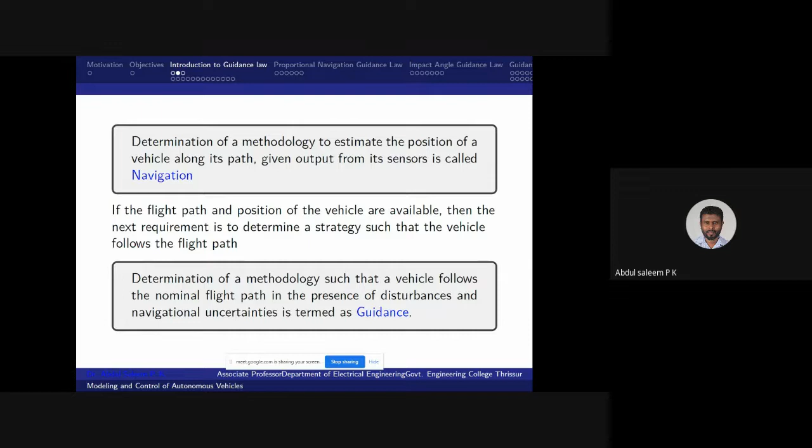Now we have to determine a methodology by which the vehicle can follow the nominal path. Suppose this is a nominal path - then we have to develop a methodology by which the vehicle, that is the missile, is able to move along this path, or follow this path.

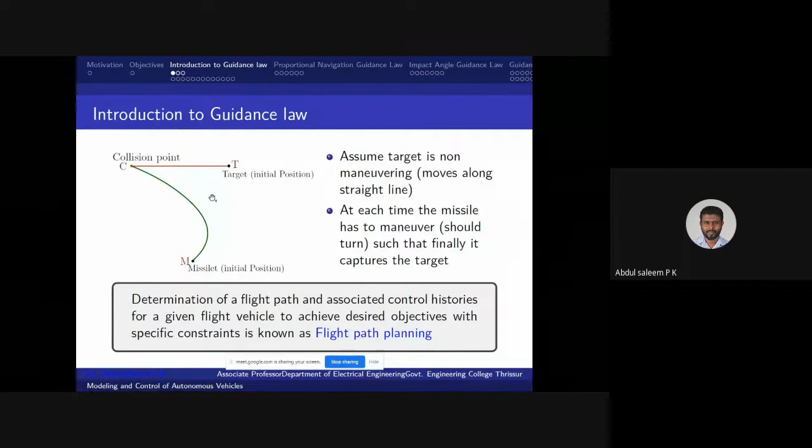That methodology, that strategy, is known as guidance. And also, in order to achieve this, we have to make sure that the angular orientation is along a particular direction, and for that a control is required. But this is just some basic concept about navigation, guidance, and control.

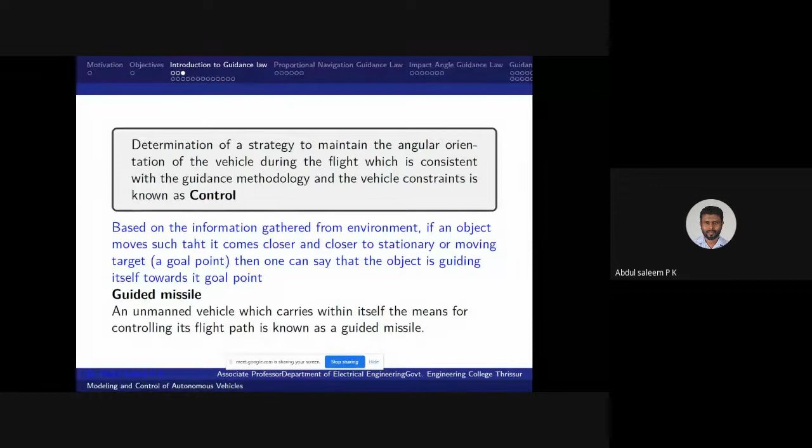Based on the information gathered from the environment, if an object moves such that it comes closer and closer to a stationary or moving target, then we can say that the object is guiding itself towards its goal point. A guided missile is an unmanned vehicle which carries within itself the means for controlling its flight path - this is known as a guided missile.

Now we can have some basic concepts on interception and avoidance. In the case of a missile, the primary objective is interception - that is, the missile should hit the target. Whereas in the case of robots, the main objective may be to avoid an obstacle.

Therefore, these two things are actually two sides of the same coin. If we have a strategy that can be used for intercepting a target by a missile, then the opposite strategy can be used to avoid an obstacle by a robot.

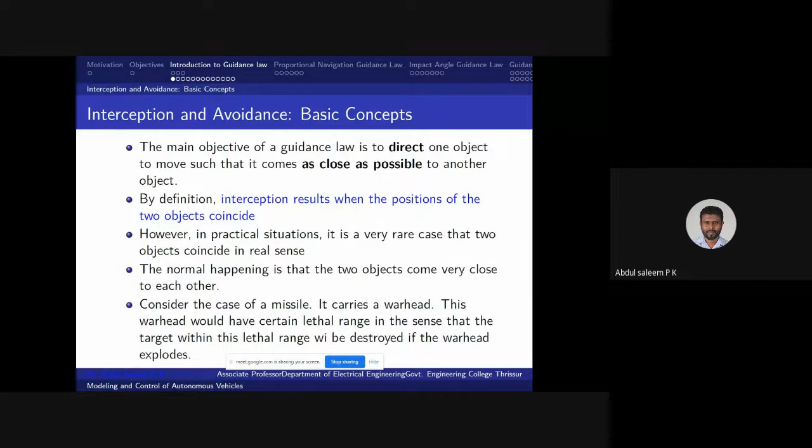Now we will discuss the engagement between two-point objects. Here we assume that we are not applying any guidance law. If we are not applying any guidance law, what is the condition so that a missile will hit the target? If we know that condition, then what we can do? We can develop a methodology such that this condition is satisfied.

Once this condition is satisfied, we can ensure that the missile hits the target. Therefore, first we will consider a case where the missile is not guided, an unguided missile. So here we have a missile M and a target T. This is the directional velocity of the missile, and this is the directional movement of the target. We assume that there is no maneuvering.

Now we have some definitions. The distance between the missile and target is known as line of sight. It is usually denoted by the letter R, which is also known as range or LOS separation, the line of sight separation. And the angle made by this LOS with respect to a reference, for example the x-axis, is known as LOS angle, and in this presentation it is denoted by theta.

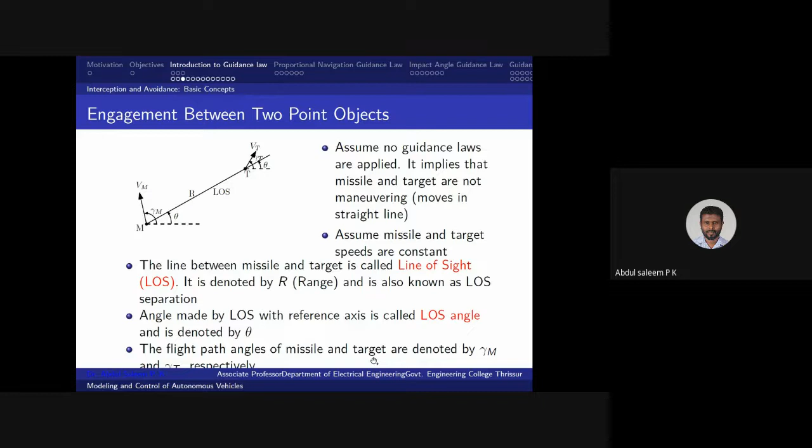Now we can think about the modeling of the kinematics or the modeling of the engagement between this missile and target. What we are doing is that this velocity vector of the missile is resolved into two components. One component is along the direction of the LOS, and the other component is perpendicular to LOS. The same way, we have resolved the target velocity also into two components, one along the direction of the LOS and the other along a direction perpendicular to LOS.

Therefore, this component VMR is the component of the missile velocity along the LOS, obtained as Vm into cosine of this angle. But this angle is actually gamma m minus theta. Therefore, we will be getting VMR equal to Vm cos(gamma m minus theta). Similarly, we can get the other component V theta equal to Vm sin(gamma m minus theta). In the same way, we can resolve target velocity into two components as given by these two equations.

But here we assume that Vm, Vt, gamma m and gamma t all are constants. Therefore, the only state variables are r and theta. Therefore, in order to develop a mathematical model, we have to find r dot and theta dot.

So r dot is the velocity along this direction, that is dr by dt, the velocity along this direction. But that is nothing but the target velocity minus the missile velocity components. Therefore, Vtr minus Vmr is the velocity along this direction. Therefore, r dot will be equal to this expression, equation 1.

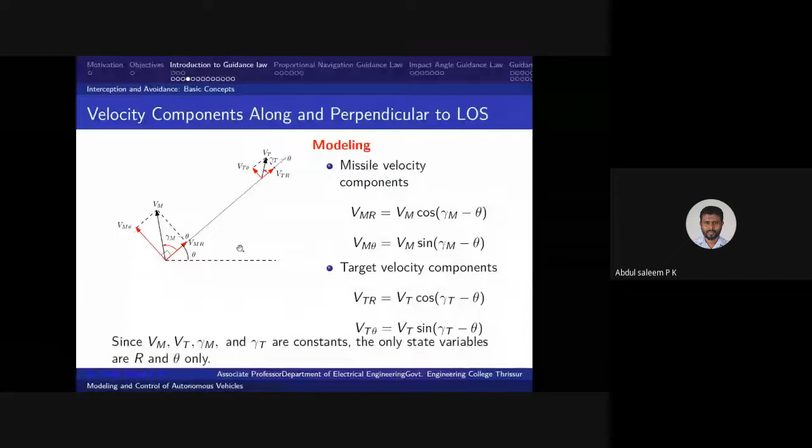In the same way, V theta, which is also equal to r into theta dot, will be equal to the difference of the velocities along the direction perpendicular to LOS. Therefore, this velocity component minus this velocity component will give you r theta dot. Therefore, these are the two state equations or engagement equations for this case.

Now, using these two equations, we can develop a methodology so that we can derive the condition for capturability of the two vehicles, the missile and the target. So for that, first we will obtain a V theta versus Vr trajectory. V theta is the velocity along a direction perpendicular to LOS, that is R theta dot, and Vr is R dot, the velocity along the LOS direction. We can get many interesting results if we draw this V theta-Vr curve.

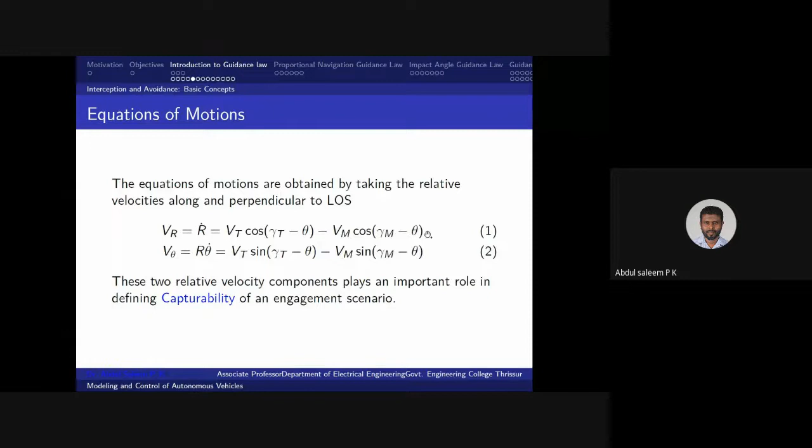For that, what we are doing is that first we will find VR dot, that is we will take the derivative of this equation, VR dot or R double dot. If you differentiate this with respect to time, we will get Vt sin(gamma t minus theta) into minus theta dot. Similarly, Vm sin(gamma m minus theta) into minus theta dot. Therefore, we will get an expression like this, which can be simplified into theta dot into V theta, because Vt sin(gamma t minus theta) minus Vm sin(gamma minus theta) has already been defined as V theta. Therefore, we get an equation like this.

Similarly, we can obtain the other equation, V theta dot is equal to minus theta dot into Vr.

Now, in both expressions, we have theta dot. Therefore, from here, theta dot is equal to Vr dot by V theta. And from this equation, theta dot is equal to minus V theta dot by Vr. We have got this equation. Now we can cross multiply these two equations.

It is clear, it's obvious that this equation represents that of a circle with radius C. How can we get C? By substituting the initial condition, we can get the value of C, obtained from this equation. Therefore, the trajectory Vr, V theta will be a circle of radius square root of Vr naught square plus V theta naught square. Multiply equation 4 and 6 by R yields...

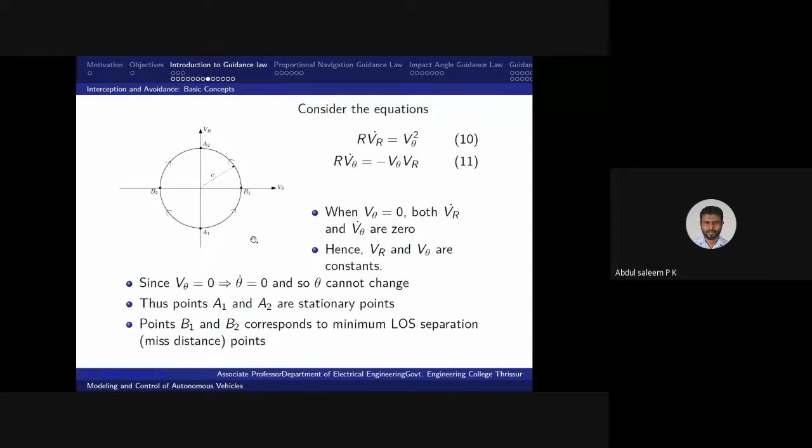Now we will see three different cases based on these discussions. I will show you one by one.

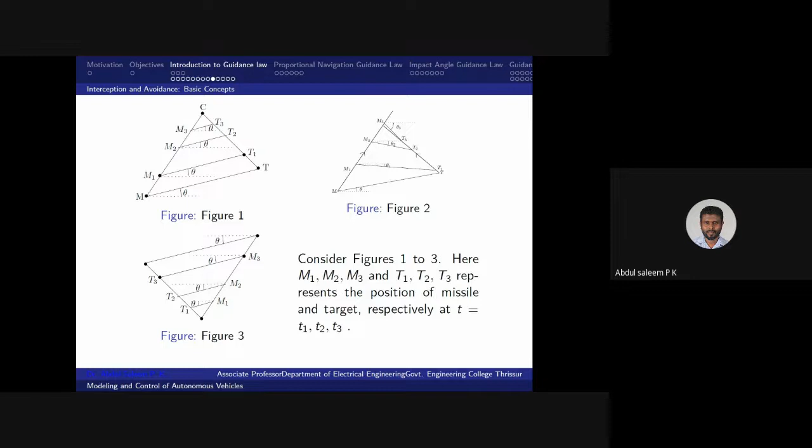First case, this one, is called a collision triangle. Initially missile is here and target is here. Missile is moving along this direction and target is moving along this direction. At t equal to 0, this is the position. At t equal to t1, this is the position of the missile and this is the position of the target. The LOS angle, with respect to the reference x-axis, is theta. This is the case for t equal to t2 and this is the case for t equal to t3. But you can see that in all these cases, theta is the same.

There is no change in theta. If that condition is satisfied, then theta dot will be 0, that is, it is a stationary point. Theta dot equal to 0.

One more thing you can see is that as the engagement proceeds, the distance between missile and target is decreasing, and finally they will collide at this point. From here we get a very interesting result: in order to guarantee that a collision is achieved, theta should not change, theta dot should be 0 or theta should be constant. Also, the distance between missile and target should decrease as the engagement proceeds.

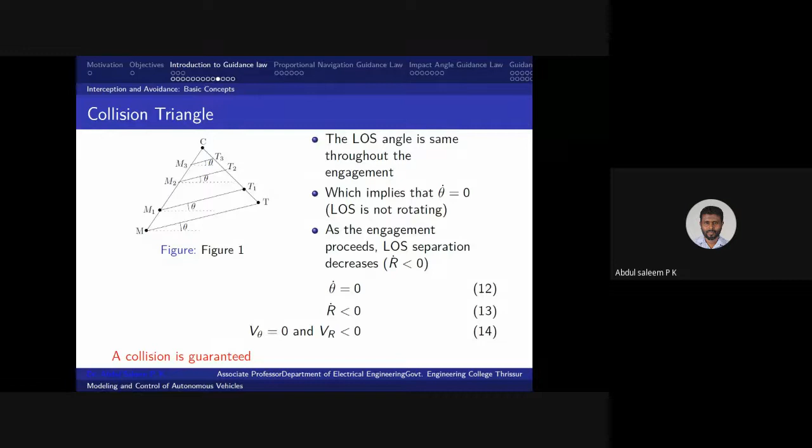Therefore, the conditions are theta dot equal to 0 and r dot less than 0, or v theta equal to 0 and vr less than 0. These are the conditions that must be satisfied in order to achieve a collision between missile and target.

Now, here is another case where we can see that the values of theta are not the same. They are different here. Even though the values of theta seem to be increasing, it is increasing in the negative direction. Therefore, actually theta is decreasing, and theta dot will be negative in this case. Anyway, theta dot is not 0.

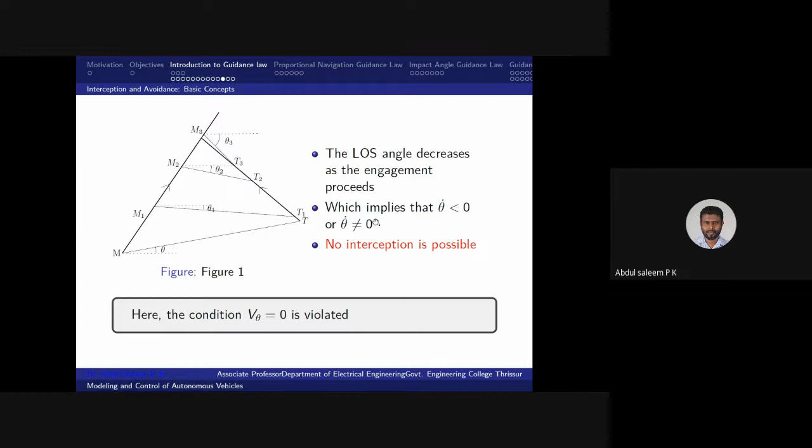The distance between the target and missile is decreasing, so that condition is satisfied, but the other condition, theta dot equals 0, is not satisfied. Finally, you can see that no interception is possible, because at this point the missile is here and the target is here only. After some time, the missile will go here and the target will come this way. Therefore, collision is not possible in this case, because the first condition, theta dot equals 0, is not satisfied.

The third case: here you can see theta is the same throughout, that is, theta dot equals 0, so the first condition is satisfied. But this is the initial case, this is t equal to t1, t2, t3, etc. Here we can see that the distance between missile and target is increasing as the engagement proceeds, and we can see that here it is not possible to have an interception.

Therefore, what we can conclude is that the condition for a guaranteed collision between the two is that theta dot should be equal to 0 and r dot should be less than 0. If these two conditions are satisfied, then definitely a collision will be achieved. If theta dot equals 0 and r dot is greater than 0, then no collision is possible. In that case, if avoidance is our objective, this condition can be used.

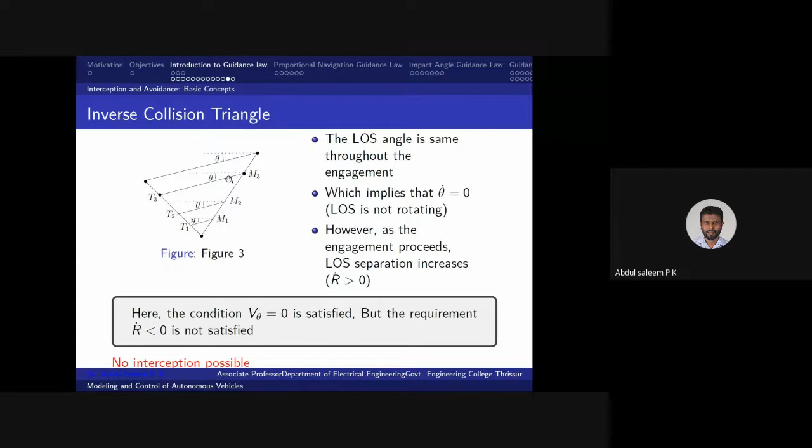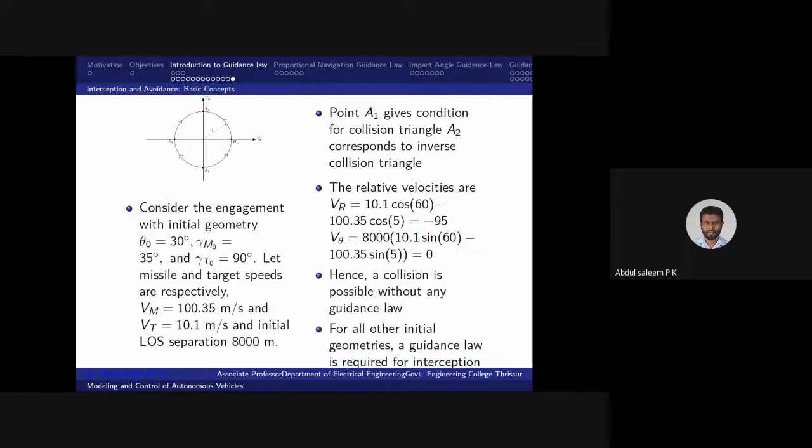Only for this particular initial condition is the collision possible, provided you are not applying any guidance law. Therefore, what we are going to do is apply a guidance law such that these two conditions are finally satisfied. Once satisfied, a collision will be possible.

Now we will discuss some guidance laws. One is the proportional navigation guidance law, also known as the PN guidance law. This is one of the most widely used guidance laws because it is very simple and easy to implement, and it is robust. Now we can see how this PN guidance law is developed, or what is the history behind the development of this guidance law.

Earlier, now we know that the mariners are using some sophisticated instruments, but in earlier days it was not so. What is the thumb rule that the mariners were using to avoid a collision with another ship? There may be a number of ships, and each ship should make sure that it is not colliding with any other ships.

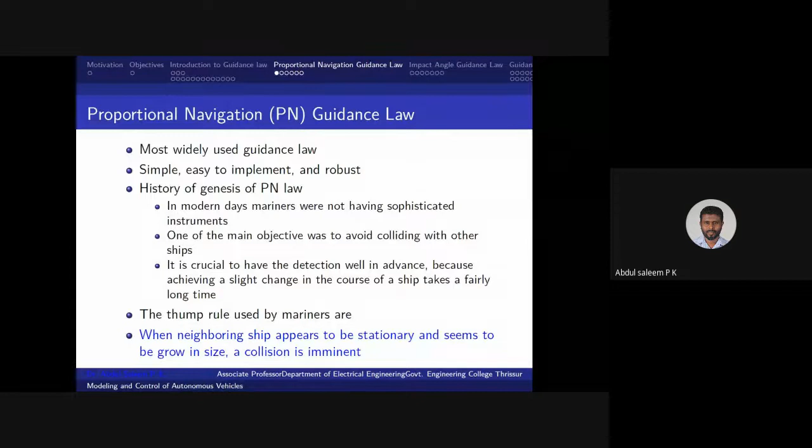The thumb rule they used is: when a neighboring ship appears to be stationary and seems to be growing in size, a collision is imminent. If the people in a particular ship feel that the other ship is stationary, and also that the size of the other ship is growing, then surely a collision will happen. That is the analysis we can have.

The other ship appearing stationary with respect to our ship implies that the line of sight between the two ships is stationary, that is, not changing. If the other ship seems stationary, it means the line of sight between our ship and the other ship is constant, not changing. That is, theta is not changing, so V theta is equal to 0.

The second condition, that the size of the other ship seems to be growing, implies that the LOS separation between the two is decreasing, that is, VR is less than 0. Actually they were using these two conditions: V theta should be equal to 0 and VR should be less than 0.

If these two conditions are satisfied, then they know that a collision is sure, and therefore they have to maneuver such that a collision is avoided. These are the two conditions which are necessary and sufficient to ensure that an interception of the missile with the target is possible. These two observations were used in designing the proportional navigation guidance law.

The second observation, VR less than 0, can be achieved if the missile is launched approximately towards the target or predicted collision point. If the target is moving, we have to find the predicted collision point, and the missile should be pointed towards that point. If it is stationary, the missile should be pointed towards the target point.

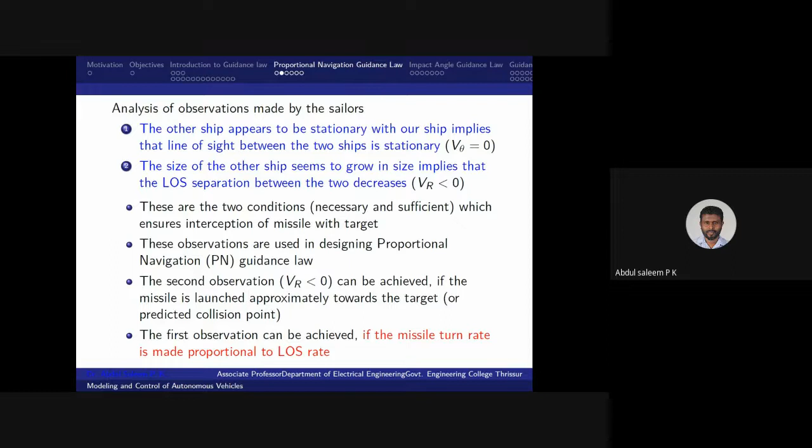We can write the guidance law as gamma m dot, the missile turn rate, proportional to the LOS turn rate theta dot, or gamma m dot is equal to n theta dot. This n is known as the navigation constant or PN constant. Therefore the lateral acceleration will be equal to this turn rate multiplied by velocity, that is n vm theta dot. This is the guidance command applied to ensure a collision between target and missile is possible. This is known as the PN guidance law.

I will show some simulations. We can assume that we have a missile-target engagement with these initial conditions.

Initially the missile velocity vector is at 60 degrees. Also, the target velocity vector is at 45 degrees. The initial LOS angle is 30 degrees, and the initial separation between the two is 7,000 meters. Also, we assume the target velocity is 250 meters per second and the missile velocity is 400 meters per second. One more assumption: the target is non-maneuvering.

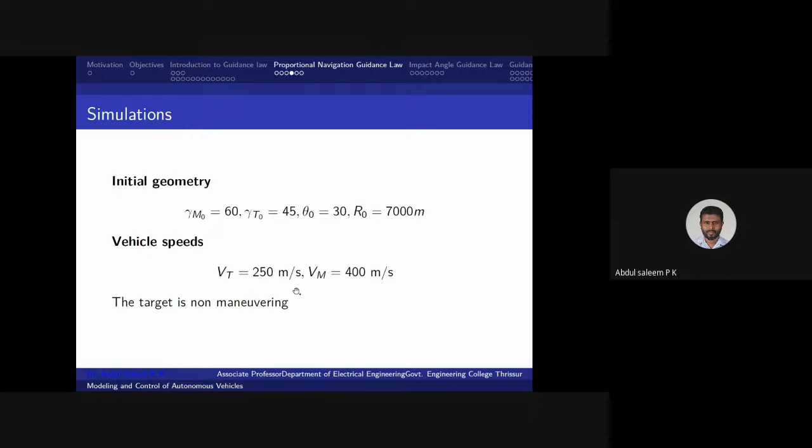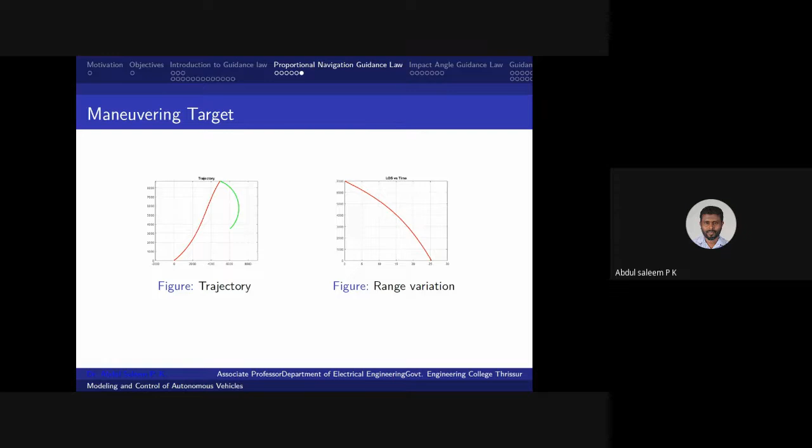There are a number of guidance laws. I am not going to discuss all of them. If you are interested, you can go to the literature and see different types of guidance laws.

Now we will see the impact angle guidance law. Impact angle means the angle at which the missile finally hits the target. It can be 90 degrees, 30 degrees, 40 degrees, etc.

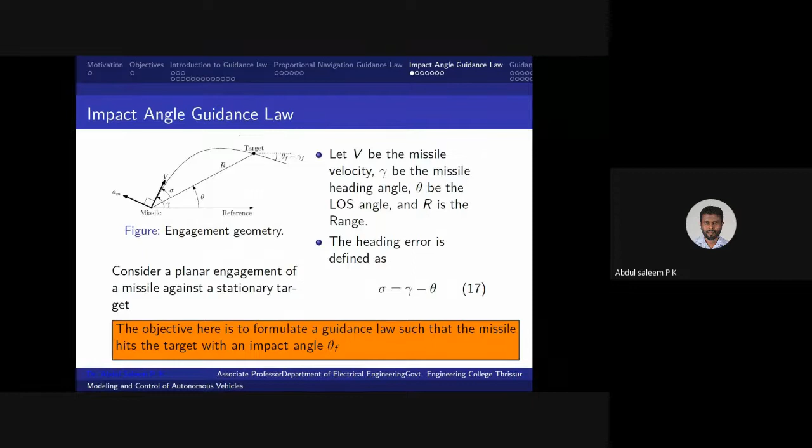See here, suppose this is a target, but we can hit it like this. In this case, if this is the reference, the angle is 90 degrees. Therefore, theta f is equal to 90 degrees.

Or we can hit the target like this, in which case theta f is equal to 0. Or we can hit the target like this, then theta f is maybe minus 30 degrees.

The direction at which the missile hits a target is very important for destroying it. Depending on which direction you hit along, the damage will be greater. Therefore, the final angle is important to achieve a more effective collision of the missile with the target, or to destroy the target.

Now, how can we achieve this desired impact angle? That is the next discussion.

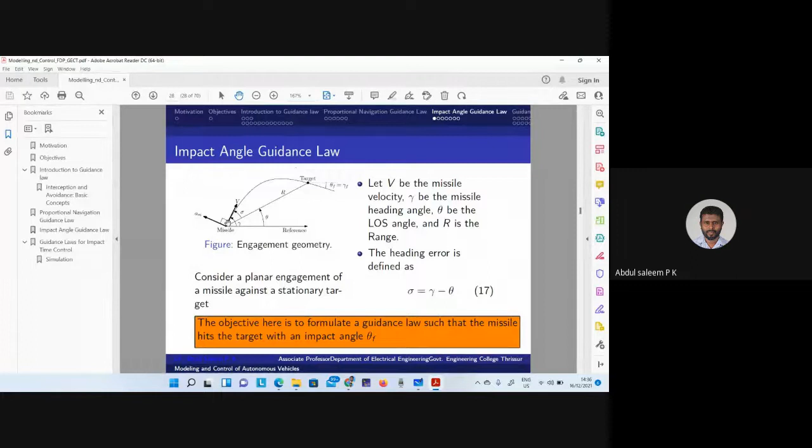Similarly, r theta dot is equal to minus v sin sigma, because the target velocity is 0 and the component of velocity perpendicular to the LOS equals v sin sigma. So minus v sin sigma equals r theta dot, or theta dot equals minus v sin sigma by r, and gamma dot equals n theta dot. That is the guidance law, where we are applying the PN guidance law.

If you are applying the PN guidance law, gamma dot is equal to n theta dot, and this expression, equation number 20, will change with respect to the guidance law we are using. But these two are the basic kinematics, that is constant, that is fixed. But this is the controlling factor. By changing this gamma or gamma dot, we are controlling the flight path. Therefore, different researchers will use different guidance laws, and accordingly this gamma dot expression will change. Since we are using PN guidance law, we have written gamma dot is equal to n theta dot.

Now, in order to achieve a desired final angle, we need a relationship between final impact angle and the navigation constant n. If you get such a relation, you can compute the value of n and use it. But that is the idea being used here. For that, we can integrate. Before that, we can do something.

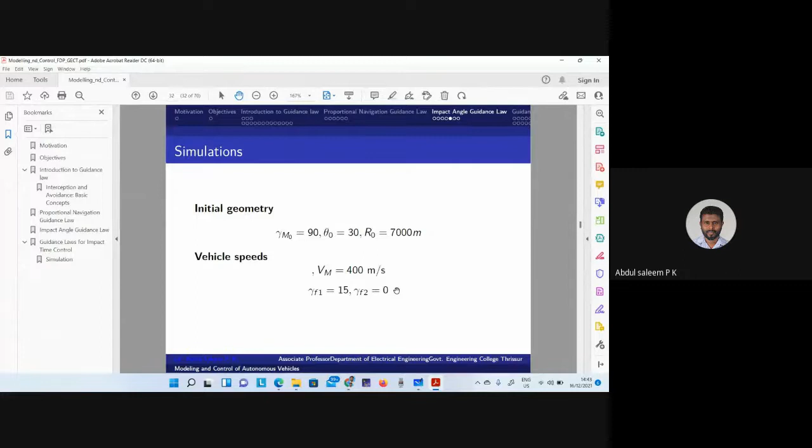We are considering two cases. In the first case, we are interested to achieve an impact angle of 15 degrees at interception time, so gamma f1 is 15 degrees. For the second case, we want gamma f2 equal to 0 degrees. I have done the simulation, and you can see the results.

Initially it is at 90 degrees. That is why the missile is going like this, maneuvering, and finally it reaches the target point. Here you can see, if you extend this line and draw a horizontal, this angle will be equal to 15 degrees.

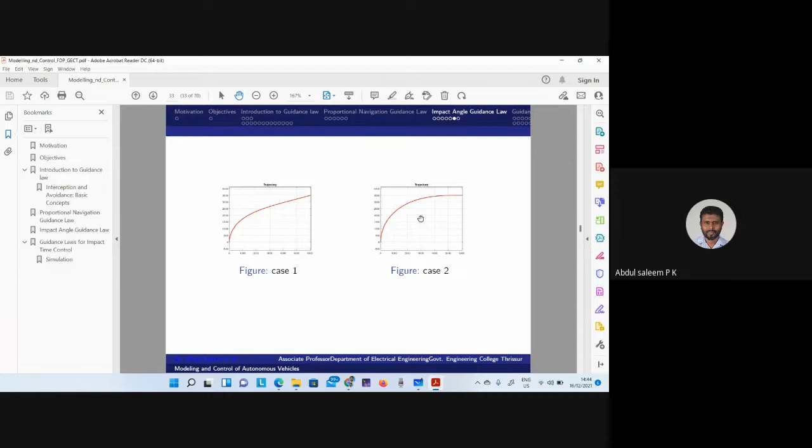That means the desired impact angle is satisfied here. For the second case, our objective is that the desired final angle should be equal to 0 degrees. It is very obvious that it is achieving 0 degrees at the interception time. Therefore, by using this methodology, we can achieve a desired impact angle.

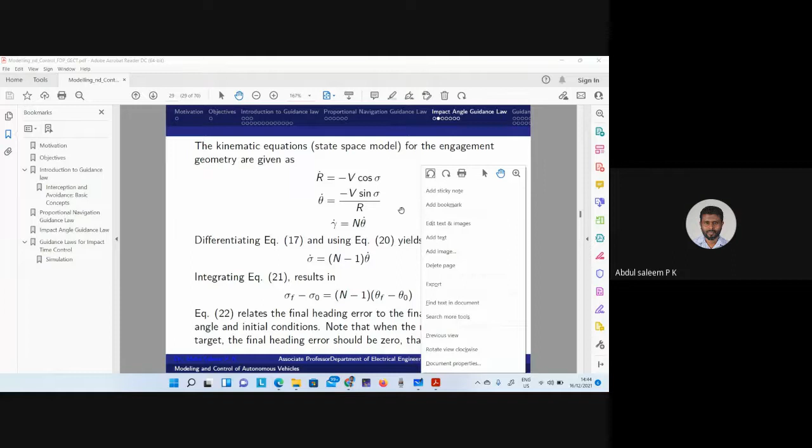The strategy we have used is our guidance law is N*V*theta_dot, where the value of n is computed such that we achieve a desired impact angle. For that, we should have a relationship between n and sigma_f, and also a relationship between sigma_f and the initial conditions.

But that formula we have obtained here. So if you compute n using this formula, with sigma_0 known, theta_0 known, and gamma as our desired final impact angle, substituting these values you will get the value of n. And if you use that n, you will be able to achieve the desired impact angle.

But there are some issues. If you are using a PN guidance law, there is a condition that n should be greater than or equal to 2, otherwise your final acceleration will be infinity. I am not going to discuss that in detail, but note this result: n must be greater than or equal to 2.

So if you substitute n equal to 2 here, this will be theta_0 minus sigma_0. That is the minimum possible final impact angle. The minimum possible value is theta_0 minus sigma_0. And in order to get the maximum value, n should be equal to infinity.

If n is infinity, sigma_0 by infinity is 0, so gamma is equal to theta_0. But this value is an ideal value only, because if n is infinity, then our lateral acceleration, n times theta_dot, will also be infinity, which is not practically feasible. Therefore, ideally we can have an impact angle up to theta_0.

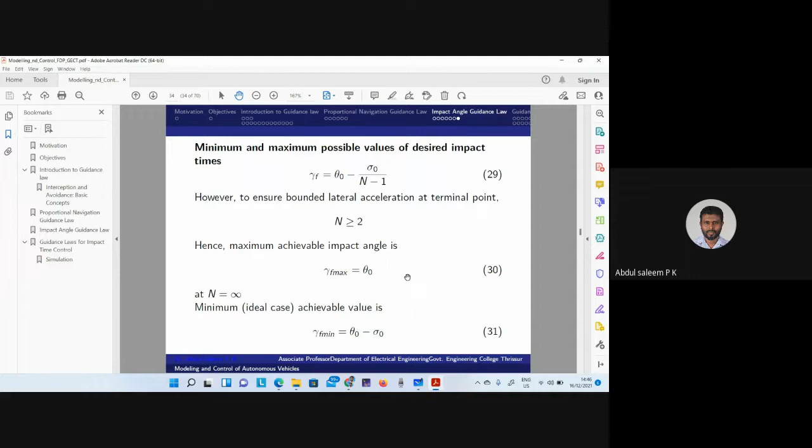Therefore, there are some limitations if you use this methodology. There are many papers in the literature showing they were able to achieve the full 360-degree impact angle, meaning any desired impact angle is possible. Some guidance laws were developed for this; you can find such papers in the literature.

And finally, we will discuss guidance laws for impact time control. As I explained earlier, the primary objective is that the missile should hit the target, but besides this main goal there are other constraints, such as the impact angle constraint we have seen, and also a constraint on the time at which the missile hits the target.

For example, suppose I say my missile should hit the target at t equal to 20 seconds. There is a constraint: it cannot be 21 seconds, it cannot be 19 seconds. It should reach there exactly at 20 seconds. Why so? I will explain.

Suppose a ship of an enemy nation is coming to attack our country. Then we should destroy that ship, so we may launch a missile to destroy that ship. But that ship has some self-defense mechanism, known as a close-in weapon system, CIWS.

By using this mechanism, the ship is able to destroy the missile that we have launched, so our objective is not satisfied; we have failed to achieve our goal. But if you launch a number of missiles, for example suppose I launch 4 missiles, and if all of these missiles reach the target simultaneously, then the defense system may destroy one or two missiles, and the other missiles will be able to destroy the enemy ship.

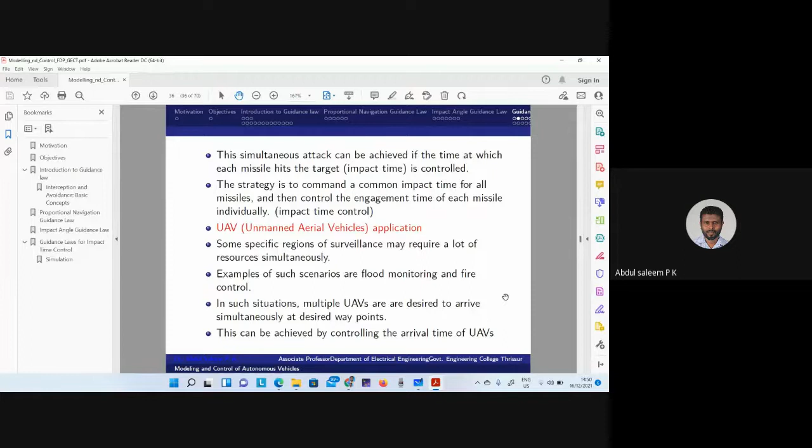But there are so many methods. One method is that we will control each of the missiles individually such that they are all commanded with a common impact time. For example, suppose I have 4 missiles and I am commanding my desired impact time as 30 seconds for all the missiles, and I am applying this guidance strategy. Then each of these missiles will move using the guidance command applied to it, and all of them will reach the target point at t equal to 30 seconds, and they will succeed in their mission. That methodology is used in this explanation.

The objective is that we have to develop a formula for AM so that it will satisfy two conditions: one, it will hit the target; second, it will hit the target at a desired predefined impact time. The objective is to find a proper guidance law governing AM, which can guarantee a desired impact time TF, and by using this guidance law, we should be able to have a simultaneous impact of multiple missiles at that predefined impact time TF. That is our objective here.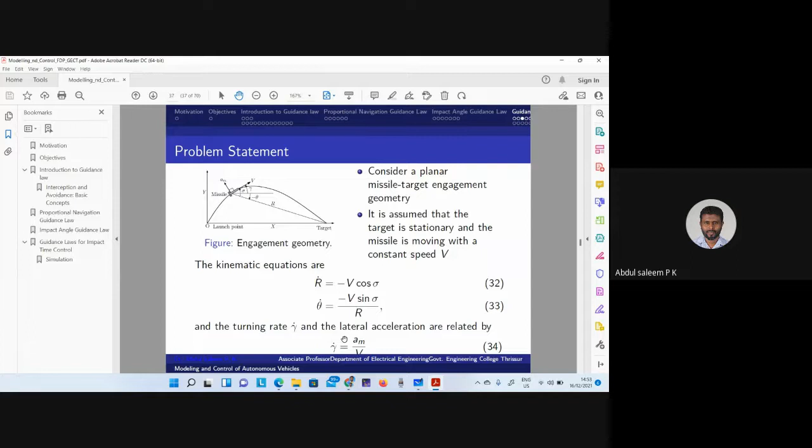Now, if the velocity of the missile is constant throughout, or if we consider the average velocity, then we can see that a missile moving along this longer path will have maximum impact time, and a missile moving along this shorter path will have minimum impact time. Therefore, in order to get different impact times, what we have to do is vary the path lengths. How can we vary the path length? Path lengths can be varied by varying the turn rate gamma dot, and gamma dot can be varied by varying the lateral acceleration AM. Therefore, our objective is to find an expression for AM so that a desired gamma dot is obtained, and thereby we will be able to achieve the desired impact time.

Now, first we can go for PN guidance law. The PN guidance law command is A equal to N V theta dot. Now, the parameter we can vary theta dot by is N. As we have done for the case of impact angle, we should be able to get an expression for N, which is a function of the desired impact time. Then we will be able to control the final arrival time of the missile. But we can see whether it is possible or not.

This is the PN impact time. You can calculate the expression for the impact time using the PN guidance law. For this, we have already seen these equations, including the heading error gamma minus theta. Actually, we want to control gamma dot, but gamma dot can be controlled by controlling sigma dot or theta dot. But theta dot we cannot control, it is a kinematic equation. Therefore, the only thing we can control is sigma dot. By controlling sigma dot, we will be able to control gamma dot, and thereby control the turn rate, and so get different path lengths so that different types of impact times can be achieved. I have already explained how this expression is obtained.

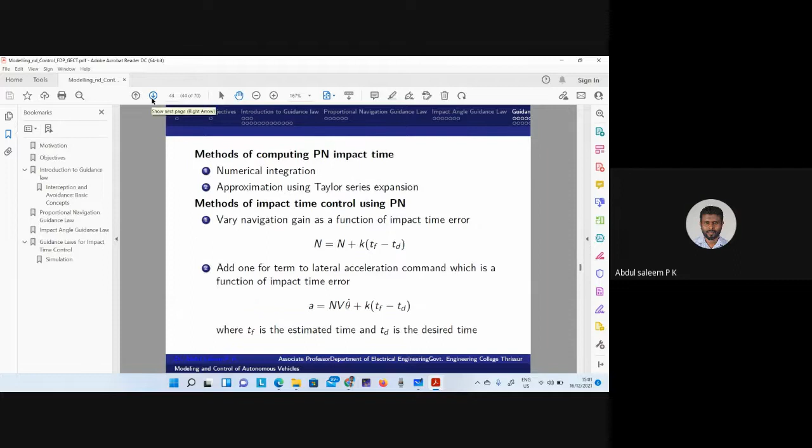Then how can we solve this issue? Our research problem is: can we formulate a guidance law such that an exact closed form solution for the impact time is possible? Also, the impact time can be controlled by a parameter which is an exact closed form expression in terms of the desired impact time. This is the research problem that is addressed to me. Fortunately, or for my luck, I was able to solve this problem, and I will explain how this problem is solved.

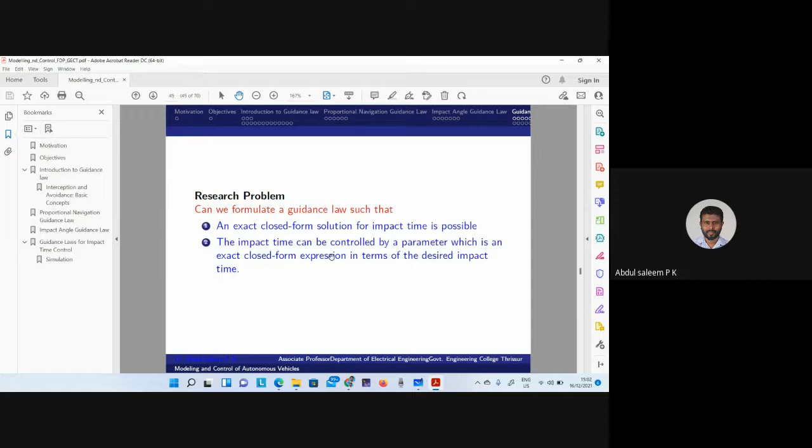Now I will explain the control formulation. I assume that my initial heading error is between this range, minus pi by 2 and plus pi by 2. That is my assumption. And I am proposing a two-phase variation in the heading error sigma as a function of the range R, as shown by equation 46 and 47.

But there are two phases. In the first phase, the heading error varies according to this expression. In the second phase, the heading error will be 0. That is, this is up to FR0. If your range, initially the range is R0, the range is decreasing, and when the range reaches FR0, where the value of F is between 0 and 1, it is a fraction.

Suppose F is equal to 0.8 and R0 is equal to 10,000. 0.8 into 10,000 is 8,000. If the value of r reaches 8,000, then this will be 0. Then after that, the heading error is 0 throughout. This is the variation in the heading error which I assume satisfies this equation.

Why have I chosen this equation? We can see later that if I choose a heading error variation as given by these two equations, then I'll be able to integrate the expression for impact time. That is the objective. Therefore, I am proposing a function - a variation for the heading error - such that that function is integrable.

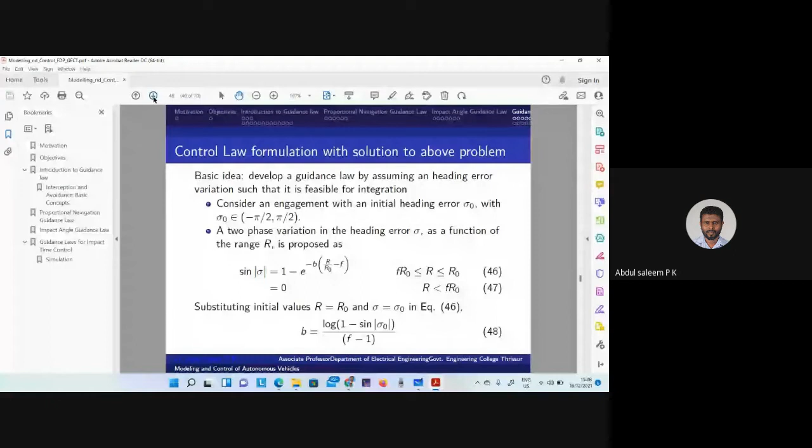Now we can derive the expression for impact time. This was our expression: d sigma by dt is equal to this expression. Therefore, I can take the terms containing sigma to one side and dt to the other. Then we get an expression like this: minus v dt equals r0 by b, into sine sigma by 1 minus sine sigma, d sigma.

Now this is easily integrable: minus v times the integral from 0 to tc, because at r equal to f r0, the time is tc only, so integral 0 to tc dt equals r0 by b, integrated over sigma from sigma0 to 0. Initially the heading is sigma0, and finally at the end of the initial phase, sigma is equal to 0. So the sigma variation is from sigma0 to 0, and this is the expression.

Now you can see that this expression, d sigma by 1 minus sine sigma, is easily integrable, and the integral gives 1 minus tan of sigma0 minus sec sigma0, divided by v. That is, we have got a closed form expression for tc, for the first phase. That is, for this one we have got this expression tc. Now we can find the expression for impact time for the next phase, that's tf minus tc.

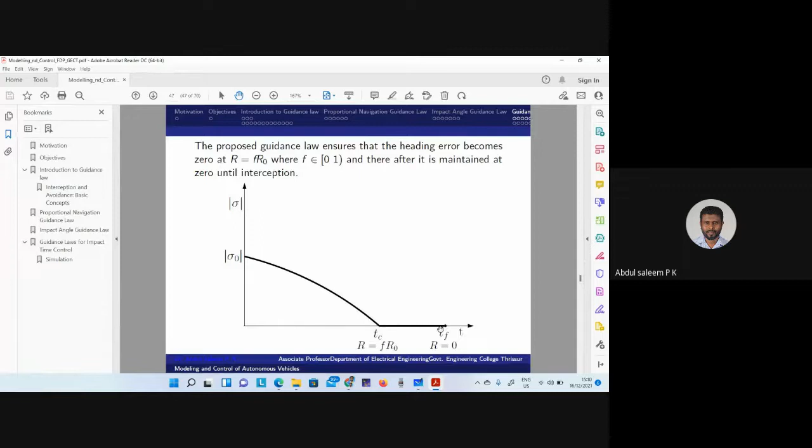Phase 2, the heading error is 0. Therefore, heading error 0 means it is moving along a straight line. There is no curved path, it is moving along a straight line. In that case, the time is just distance by velocity.

But distance is f into r0, because at that time r is equal to f times r0. The distance is fr0, speed is v. Therefore, if you divide fr0 by v, you get the time for the second phase. The total time is the sum of these two times, giving us an expression

which is a closed form expression for the impact time. This expression contains the parameter f, and also the expression for the desired impact time, and it is exact. Now we have to find an expression for the control parameter as a function of the desired impact time. That we can obtain from here.

Before going to that, I will find the maximum possible impact time and minimum possible impact time. For that, I should know how the impact time or engagement time varies as a function of f. The minimum value of f is 0, maximum value is 1. As f increases from 0 to 1, how does the impact time vary - whether it increases, decreases, or remains constant?

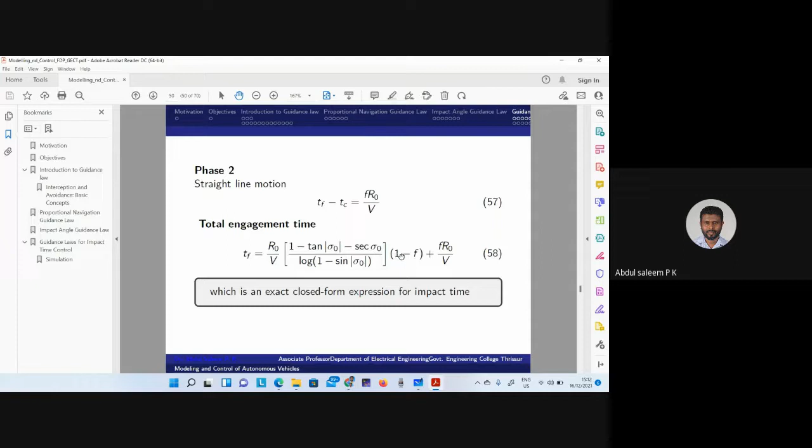Now these two can be substituted in this expression. This can be written as tf max and tf min. So this becomes tf max into 1 minus f, plus tf min into f. That expression is written here. Thus we have a simple expression for the impact time.

Tf is equal to 1 minus f into tf max, plus f into tf min, where tf max and tf min can be obtained by computing using these expressions. So we can find tf min and tf max.

From this we can get an expression for f. This expression is closed form, it is exact. Therefore, we have an exact closed form expression for the control parameter f, which is a function of the desired impact time, and also the initial condition, because tf max and tf min are functions of the initial conditions.

Thus I have achieved developing a guidance law where we have an exact expression for impact time, an exact closed form expression for this control parameter, and that control parameter is directly related to the desired impact time. Therefore, if your desired impact time is 30 seconds, you just put tf equal to 30 seconds here, compute F, and substitute this F value in your guidance law.

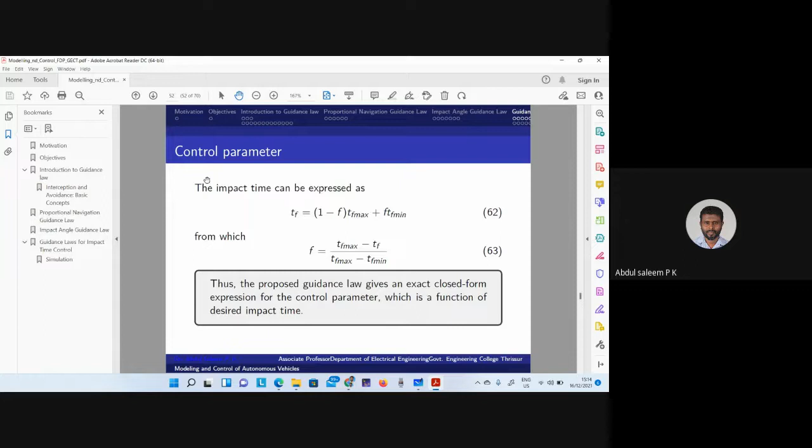You will be able to achieve a collision exactly at tf equal to 30 seconds. But the only constraint is that the tf you are selecting should be between the tf max and tf min computed by the above two expressions.

Therefore, the guidance law algorithm is: first compute tf min and tf max using those equations, then get a set of permissible values of tf like this one. But tf min is not actually possible because it is an ideal condition - to achieve it, the lateral acceleration would need to be infinity. But any value greater than this tf min is possible, and tf max anyway is possible.

It is closed bracket, and this is the open bracket. Now select a tf from S. Then find the control parameter using that equation, compute B using equation 48, and generate AM by substituting this F and B. You will be able to achieve the collision with the exact impact time.

As I explained in the impact angle problem case, here too there can be disturbances or autopilot dynamics by which the achieved acceleration may not be the same as the commanded acceleration. There will be some time lag between the achieved and commanded acceleration. Therefore, our guidance law fails to achieve the desired impact time if you use this algorithm obtained earlier, you will fail to get the desired impact time and collision because of this autopilot dynamics.

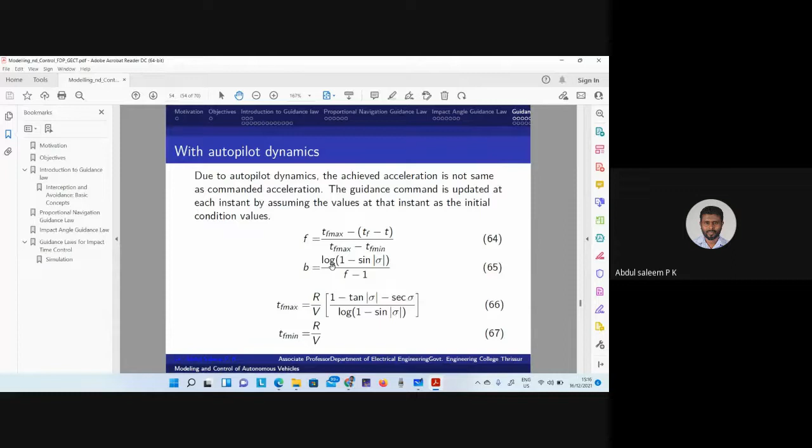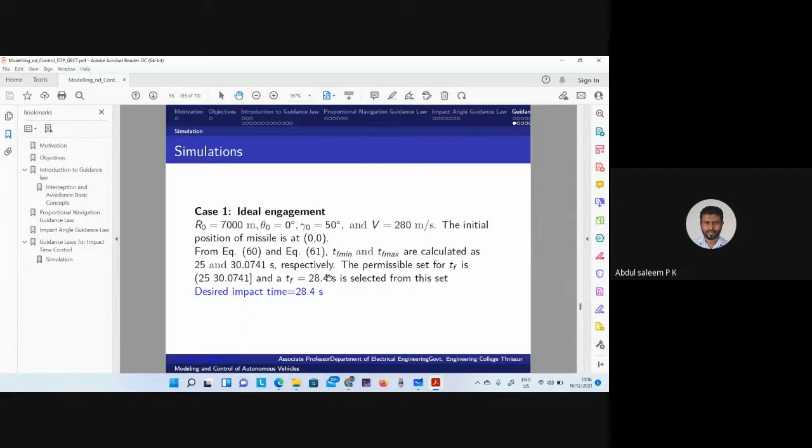That is, the guidance law succeeds in reaching the target exactly at 28.4 seconds. You can see this 28.4 seconds - exactly at 28.4 seconds it reaches the desired location.

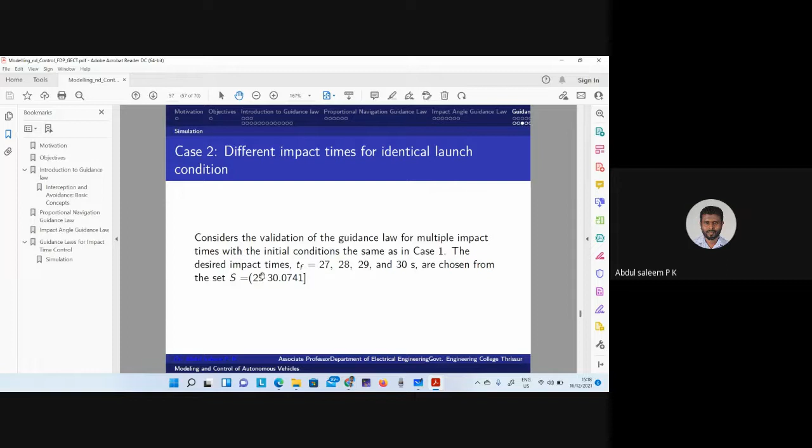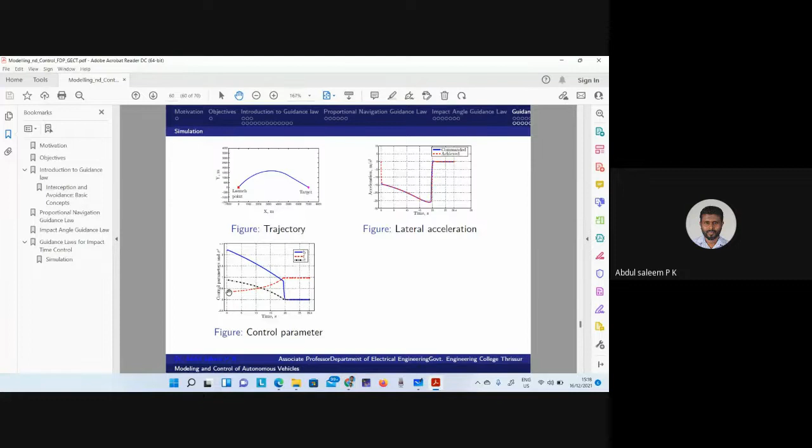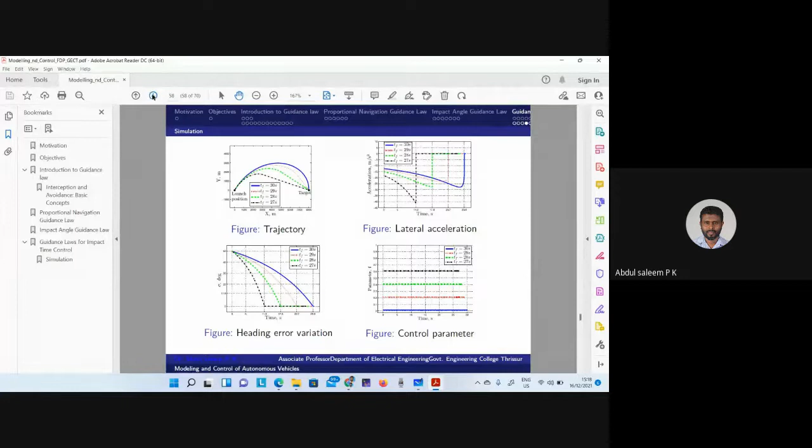Now, feedback control with autopilot delay. We assume an autopilot delay of 2.2 seconds is present. In that case also, our guidance law is able to achieve collision at exactly the desired impact time of 28.4 seconds. But you can see that here the control parameters are varying - not constant, whereas in the ideal case the control parameters B and F are constant. If you consider feedback control, the control parameters are not constant.

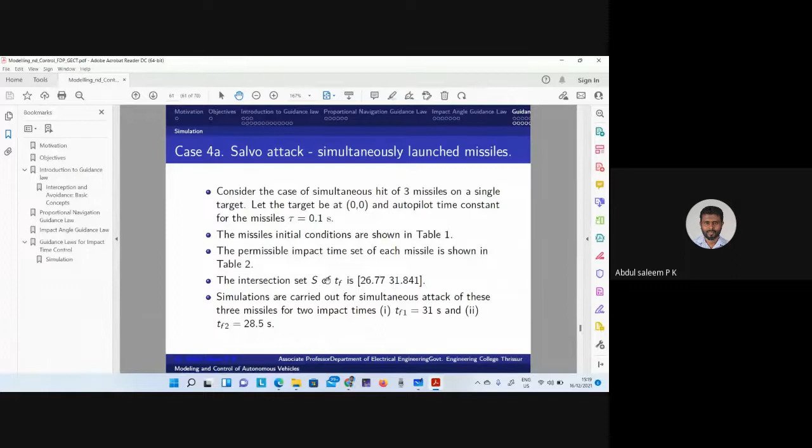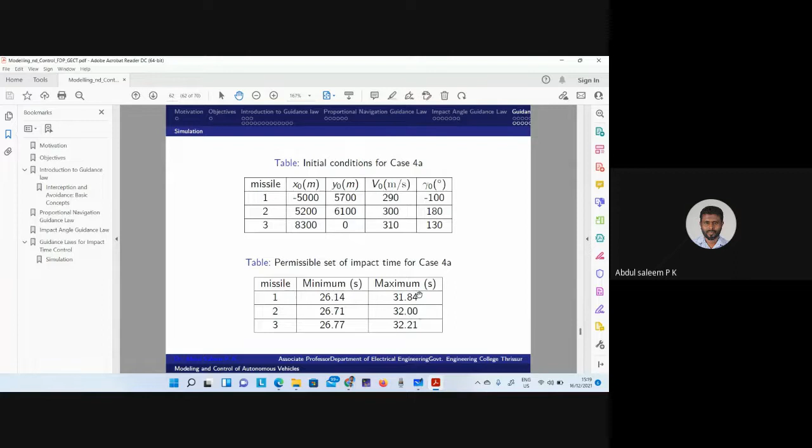Now, salvo attack means we have to achieve a simultaneous attack of all missiles. What we can do is find the impact time set of each individual missile, then find an intersection set, and choose a desired impact time from this intersection set. This is an example showing the minimum and maximum impact times for missiles 1, 2, and 3. From this we consider the intersection set: the maximum value is 26.7, minimum value is 31.84. Between these two, we select an impact time.

Okay, this is another way of achieving the simultaneous attack. Here we are not launching all the missiles at the same time. They are launching at different instances of time, maybe from the same location.

Suppose missile 1 is launched at t equal 0 second, missile 2 at t equal 1 second, missile 3 at t equal 3 second. Then suppose the desired impact time is 30 seconds.

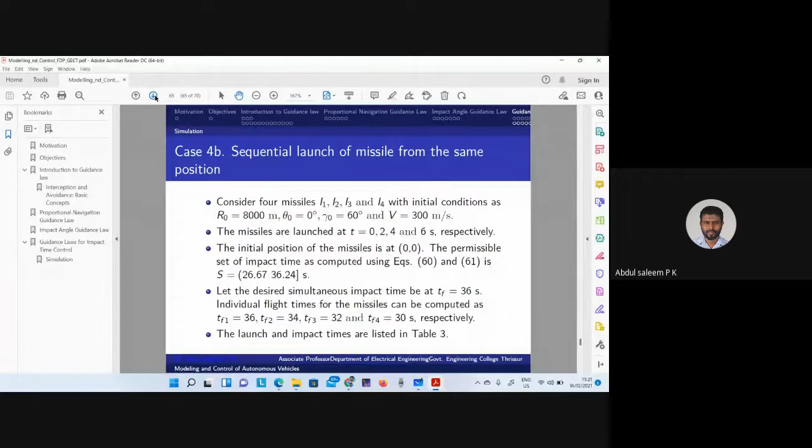That you can see here. We want 36 seconds, that is, all the missiles should reach the destination point at 36 seconds. But they are launched at 0 second, 2 second, 4 second, 6 second.

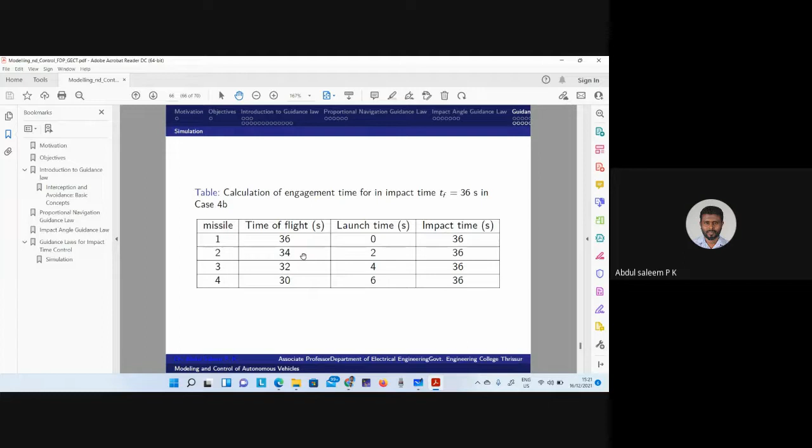For this, the engagement time is 36. For this, it is 34 seconds engagement time because it is launched at 2 seconds, and 34 plus 2 is 36. Similarly, you can see here also.

But here you can see, all are launched from the same location at a gap of 2 seconds, but all are reaching the target location at the same time. So even though they are launched at 0, 2, 4, 6 seconds, all are achieving zero separation at 36 seconds, implying that a simultaneous attack of the multiple missiles is achieved.

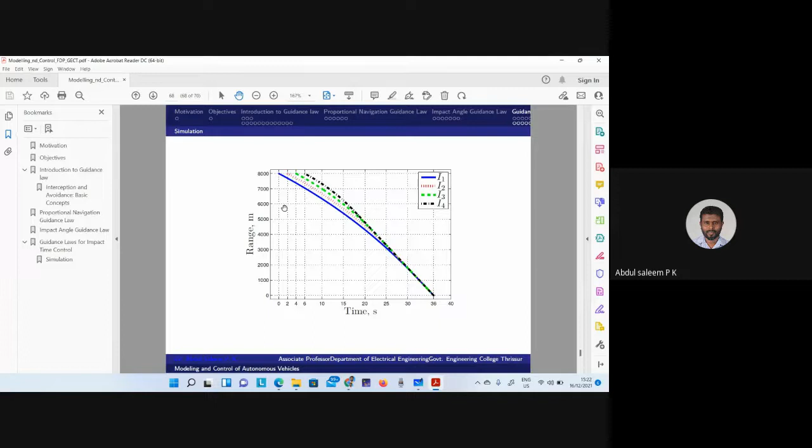Hello, doubt sir. Yes, Srija. My doubt is, if the target is a maneuvering one, how do we incorporate all those complexities into this impact time and impact angle guidance laws?

Okay, but that is a real challenging problem. If the target is maneuvering, then I think nobody has solved that problem. But if it is possible to predict the interception point, then we can consider that interception point as a stationary target, and apply the same guidance law that we have developed here. Otherwise, this guidance law, and all the guidance laws developed so far, will fail. I haven't seen any research work that can solve the case where the target is maneuvering.